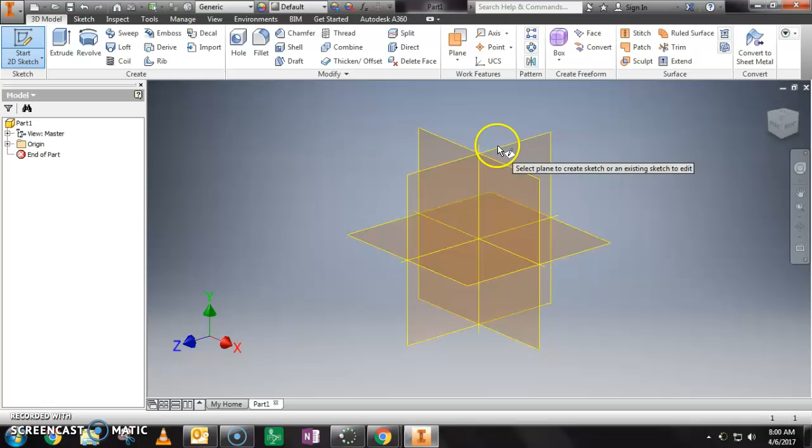Today we are going to be making a standard chair. So we're going to start with the side of the chair. Start our 2D sketch. Now this is the front, so I'm going to go from the side this time, which is the YZ plane. Now I'm going to use the line tool to make the profile, or kind of like the side view of the chair.

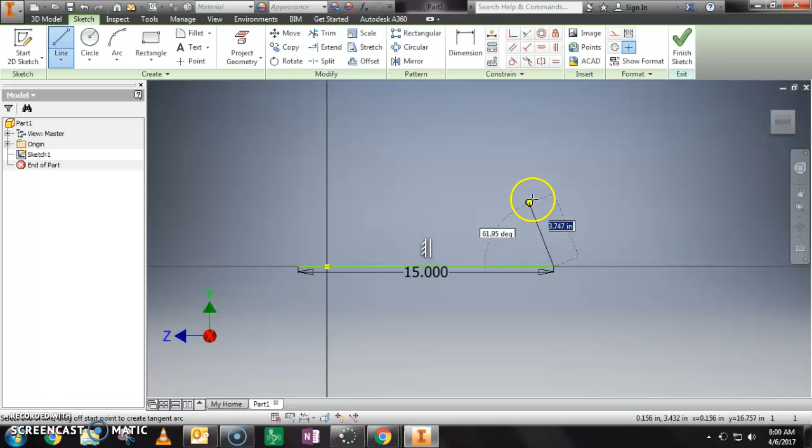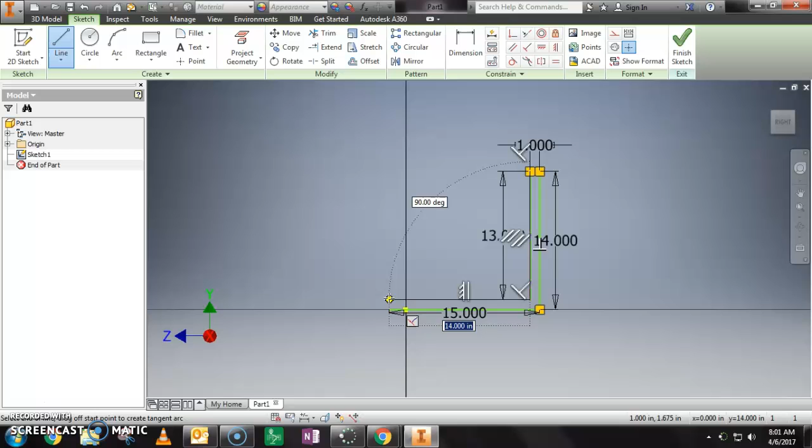So I'm going to start with the bottom. Okay, it's 15 inches. And now I'm going to go straight up, 14 inches. Now I'm going to make this 1 inch thick. Now I aim it down at 90 degrees. Since it's 1 inch thick, it's going to be 1 inch shorter than the back. So that's going to be 13 inches. And same thing here, 14 inches. I make sure I connect by getting that green dot. We're done.

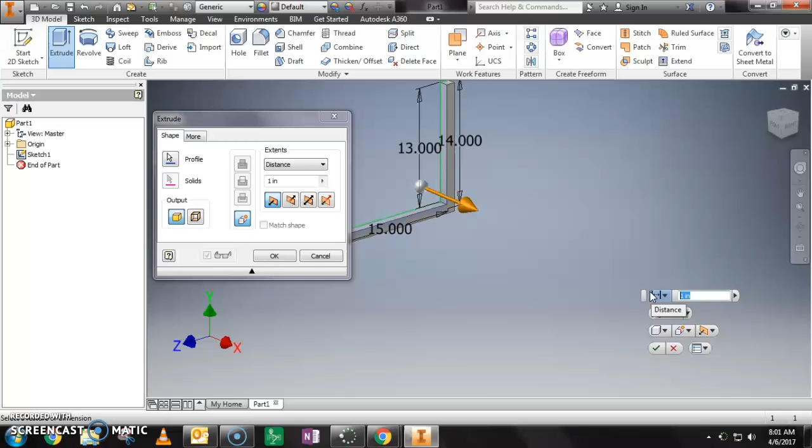Now we need to extrude. We're going to extrude it 16 inches. There we go. Beautiful. Now we've got a chair. We're going to add a hole at the top, like a handle, kind of like the chairs that you are currently sitting on. So we're going to start a sketch. It could be here or it could be here.

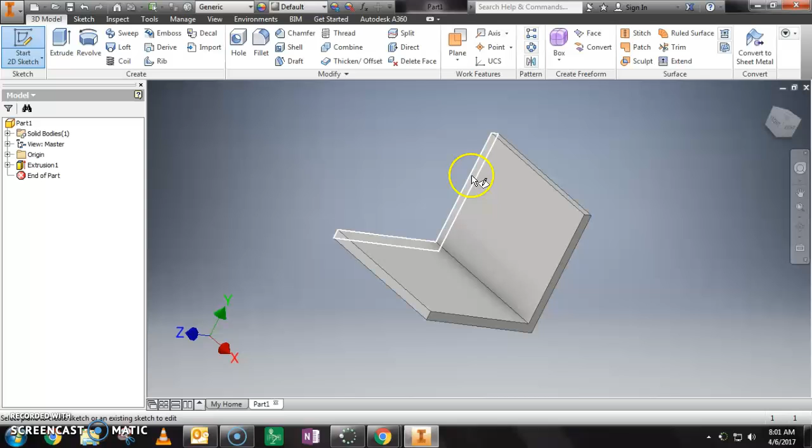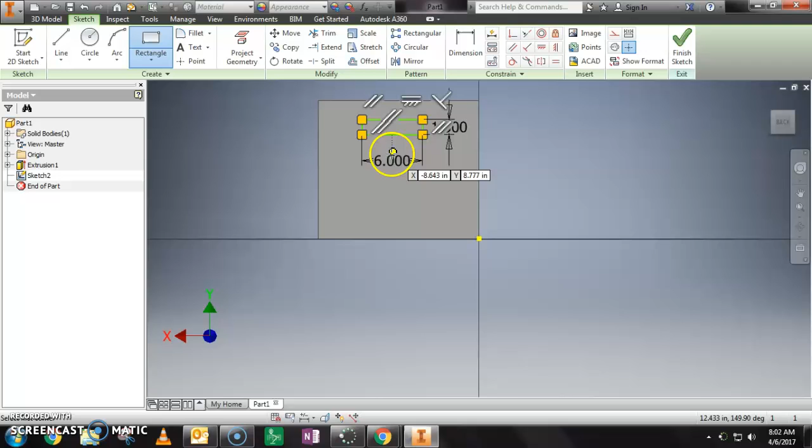We're going to make a rectangle that is 6 inches wide and, let's see, let's make it 1.5 inches tall. Now we use our dimension tool. We're going to keep this 2 inches from the top, or 1 inch from the top.

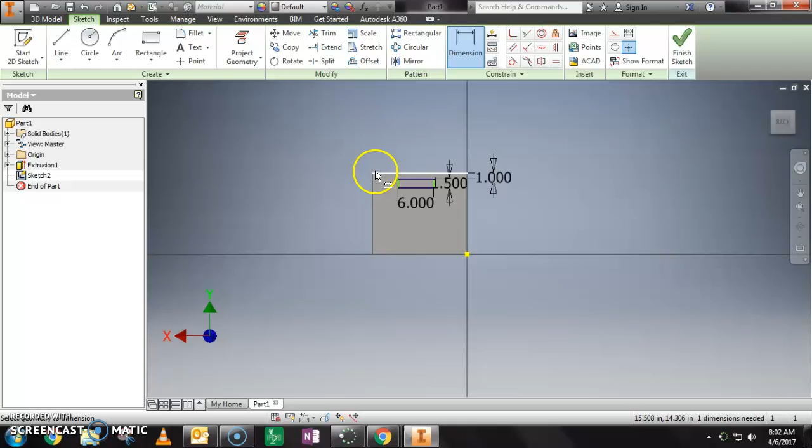And now, if the width of this whole thing is 16 inches, and there are 6 inches here, that means this plus this needs to be 10 inches. This portion plus 6 plus this portion is 16. So 16 minus 6 is 10. So to make it equivalent, it should be 5 inches on each side.

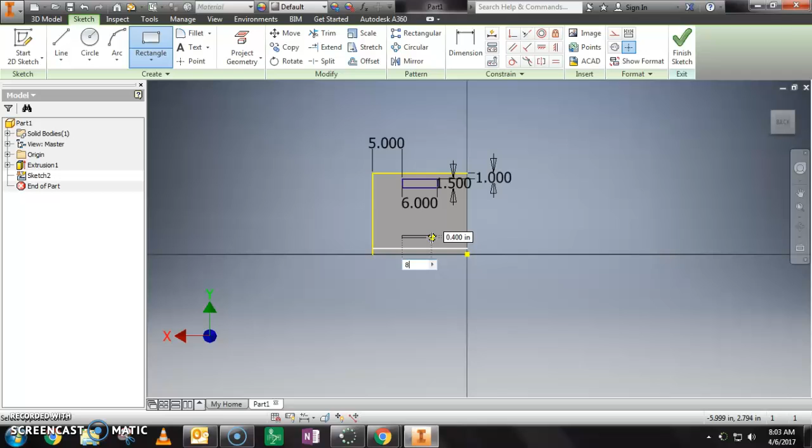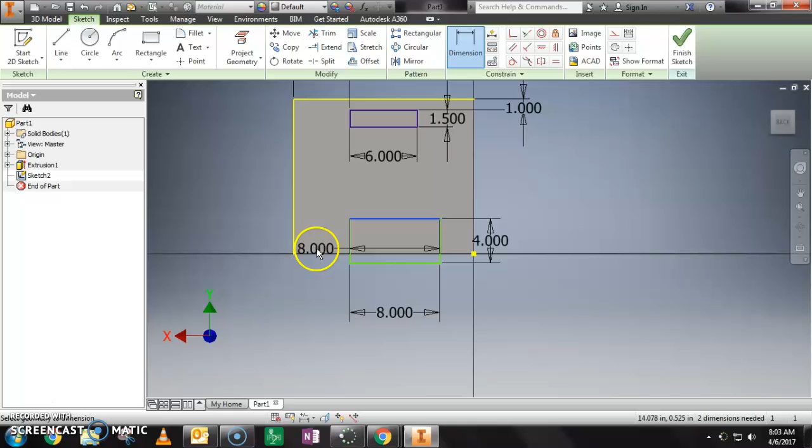Now we're also going to draw a sketch down here for your hiney. We're going to make this one 8 inches wide. We're going to make it 4 inches tall. Now we want this to be 2 inches from the bottom. Or you make the top 2 inches plus 4 inches, 6 inches. If I were to do 2 inches for the bottom, it may actually keep it on this side. So that's why I did the top one, to make sure there are no problems.

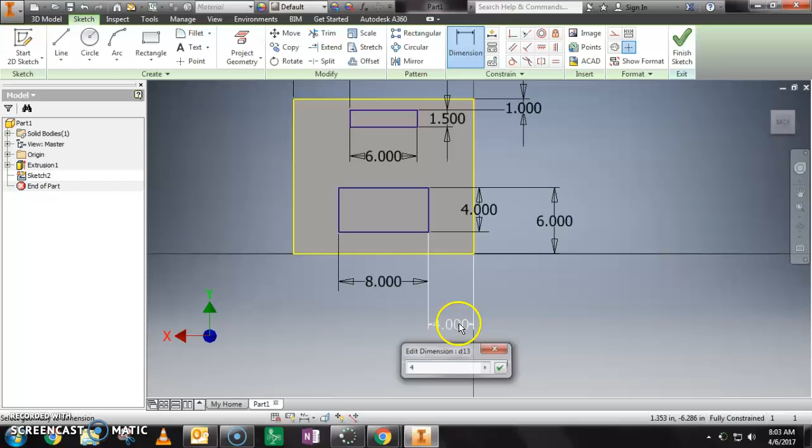Now we need to center it. If this whole thing is 16 inches, and we have 8 inches across here, then it should be 16 minus 8 is 8. Divide by 2, 4, done. Finish sketch. We're going to extrude our 2 holes. Click, click, and we're going to extrude it in. That's going to get rid of the stuff. Oh, what a chair. Beautiful.

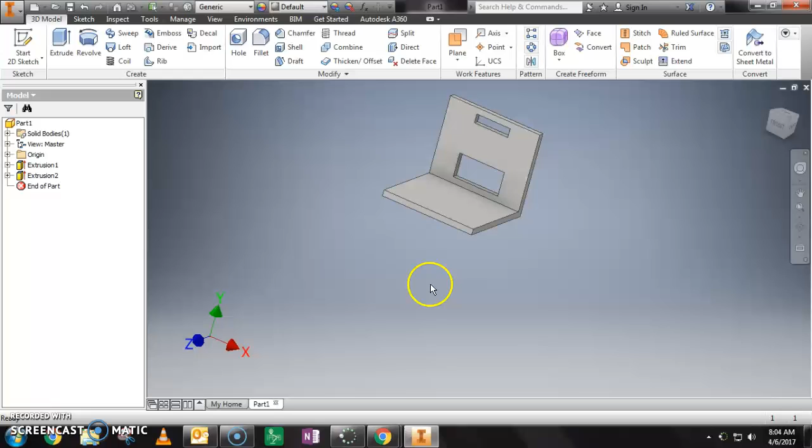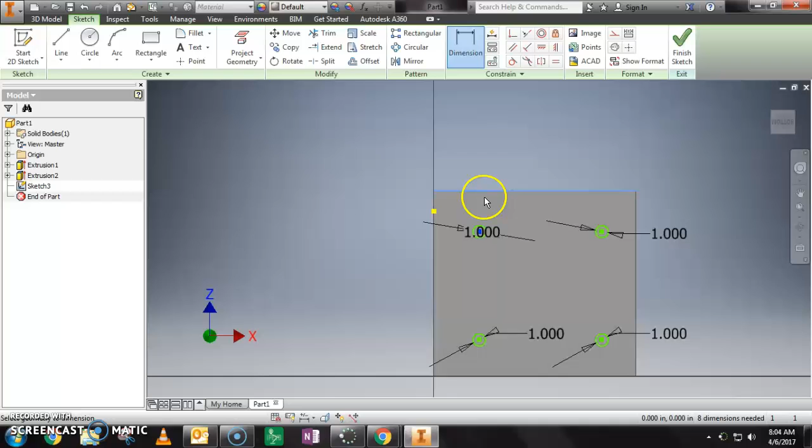Now we need to add legs, so I'm going to do this pretty quickly. Okay, start 2D sketch, circle. Each one will be 1 inch. We're going to need 4. What we need to do now is dimension each circle away from the edge of the chair by 1 inch. Make sure you click the center.

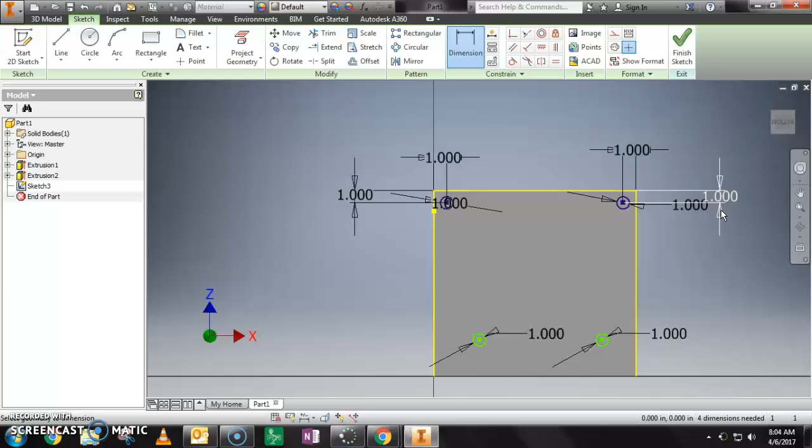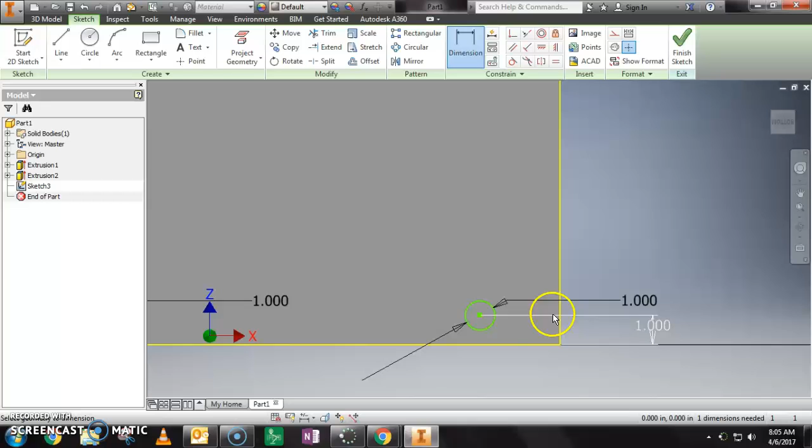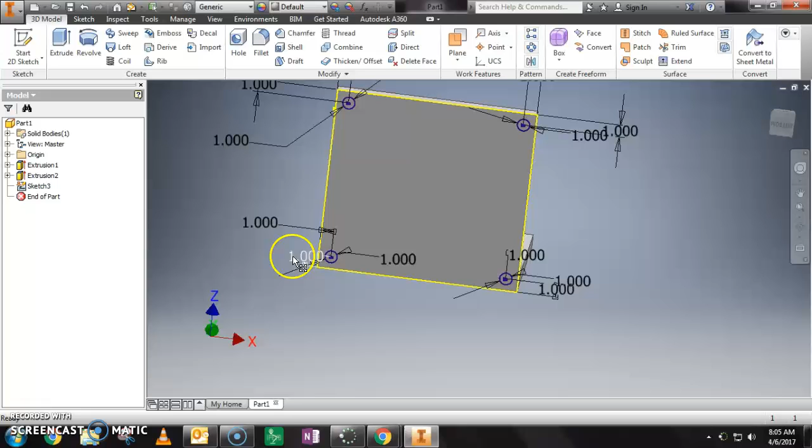Click, click, click, type. Click, click, click, type. Click, click, click, type. And click, bad object, click, type. They are all positioned correctly now, and all I have to do is extrude. So I click, nope. You can click and drag these numbers when you're not in sketch mode. Get them out of the way.

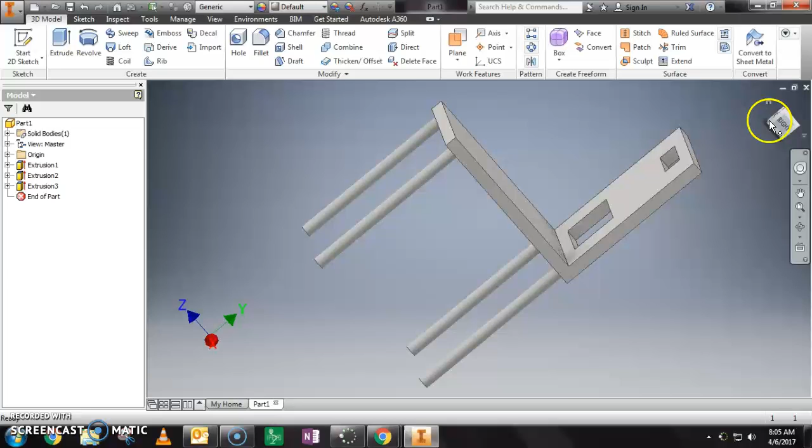And let's see, extrude, 1, 2, 3, 4. We're going to extrude 16 inches. Actually, let's make it 14 inches. And here you go. You got a nice 3D chair. But it looks a little funny, so I'm going to introduce you to two tools if you have the time. Fillet and chamfer. These will basically cut the edges to make them look prettier. Fillet is going to round it out.

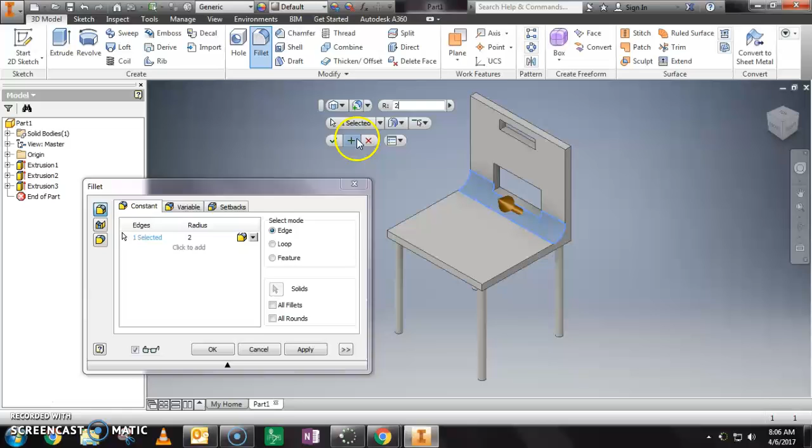So I'm going to choose this on this edge. And here it's going to give you a menu very similar to extrude. Except let's do 2 inches. And it'll give you a preview. Here, it's now rounded out. We can do fillet on every edge that it'll allow. You see, now here, that red means that we can't do it. So let's just cancel. I want to do this edge, and the edge that our back touches.

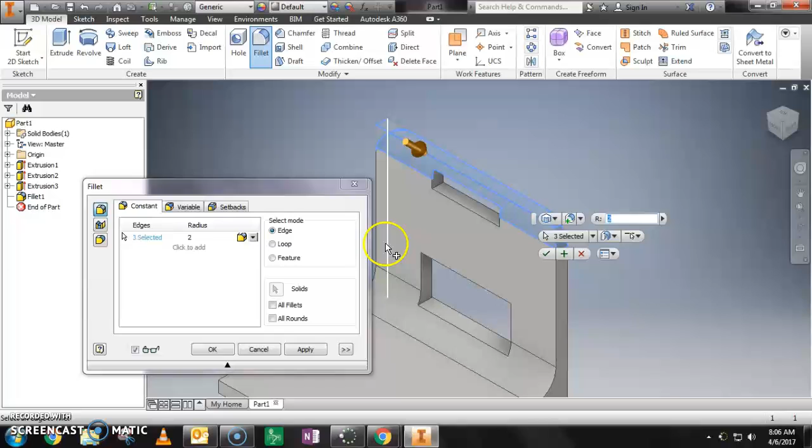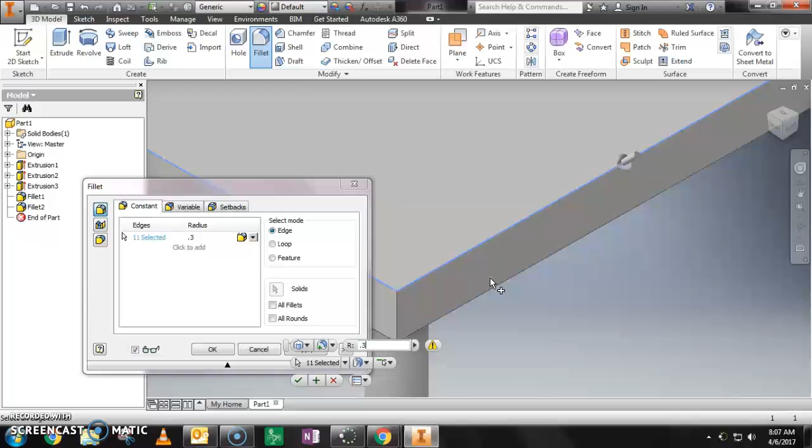Okay. Cool. And then I want to fillet these 3 edges, but I'm going to do it 0.5 inches. Nope. 2 inches. Nope. 0.3. Huh. 0.05. Alright, here it's giving us issues because we did this one. So, just so you can see, I'm going to fillet the edge and not the corner. Okay.

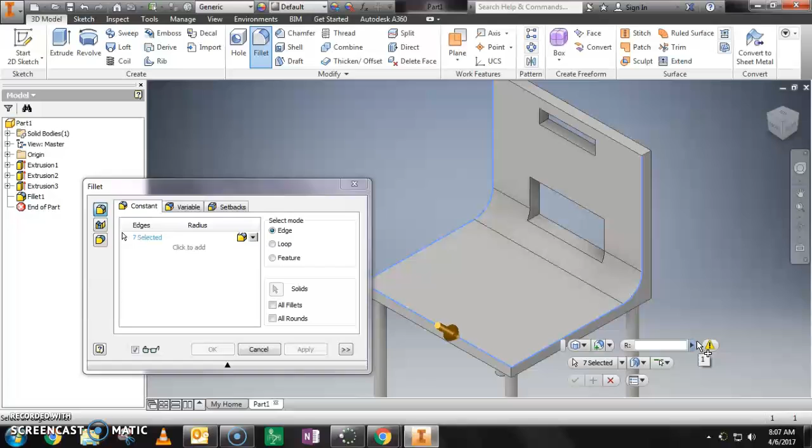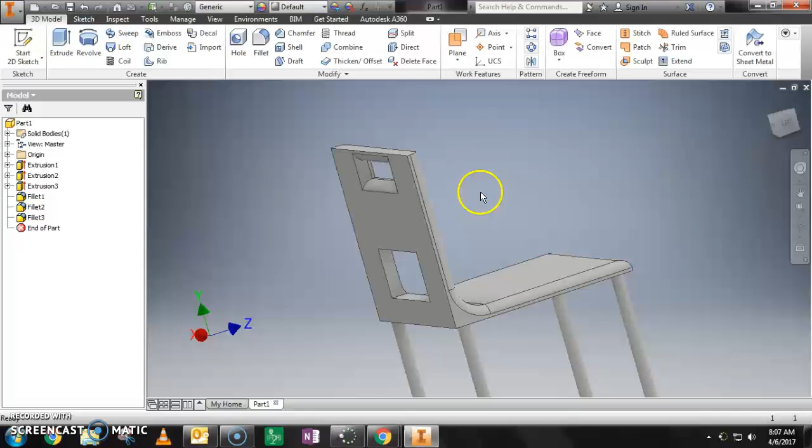So let's do that, 1 inch. 0.75. Okay, we can do 0.75. Sounds nice. Now it's nice and rounded out. So you can use that tool to round up all your rough edges, including the holes in the chair. And as long as the dimensions aren't too extreme, it'll work. Go ahead and enjoy.